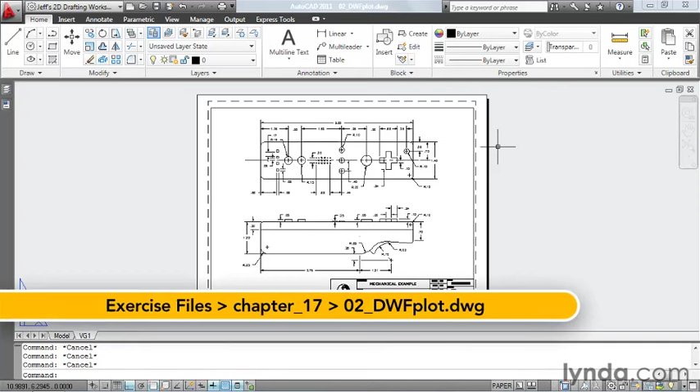Sometimes a client may want to review our CAD drawing, but they don't have AutoCAD, so a DWG file isn't helpful. At times like these, we can ship our client a DWFX file. DWFX stands for Design Web Format, and a DWFX file can be opened or printed from a current version of Internet Explorer.

On my screen, I have a finished drawing. Let's say I'd like to send this drawing to a client for their review, and let's also say that my client doesn't have a version of AutoCAD.

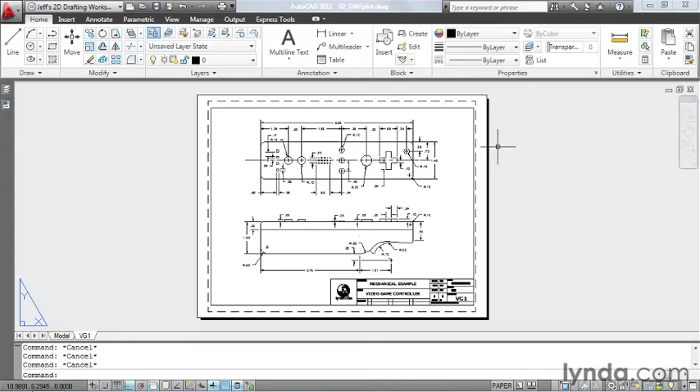What I'm going to do is plot this drawing as a DWFX. I'll do that by launching the plot command, and then regardless of the printer I was using, I'm going to click this flyout and select DWFX ePlot. This is a virtual printer that is installed automatically with AutoCAD, and that's all I have to do.

I'll come down and click OK, and I'm going to save this inside the Chapter 17 folder inside our Exercise Files directory. I'll accept the default file name, and I'll click Save.

The file I just created can be opened natively in Internet Explorer. I'm going to open my Windows Explorer, jump out to the desktop, open up the Exercise Files folder, and come down and open up Chapter 17. Here's the DWF file that we just created.

I'm going to right-click, come down to Open With, and select Internet Explorer. Now, if you're not seeing Internet Explorer on your system, you can select Choose Default Program, come down and select Browse, navigate into the Internet Explorer folder, and the executable is right here. Since Internet Explorer is selected, I'm going to click OK.

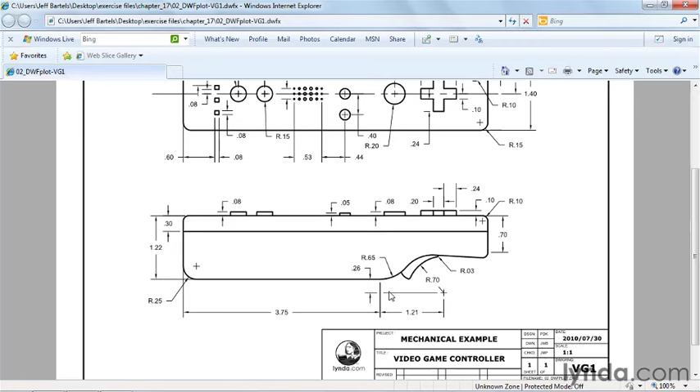And this is how my client can review the drawing. I can roll my scroll wheel or use these sliders to pan around in my drawing. Underneath the page flyout, I have access to my zoom controls where I can zoom in and out. Likewise, I can press Control+ or Control- to zoom. If I'd like to print the drawing, I can use the icon right here.

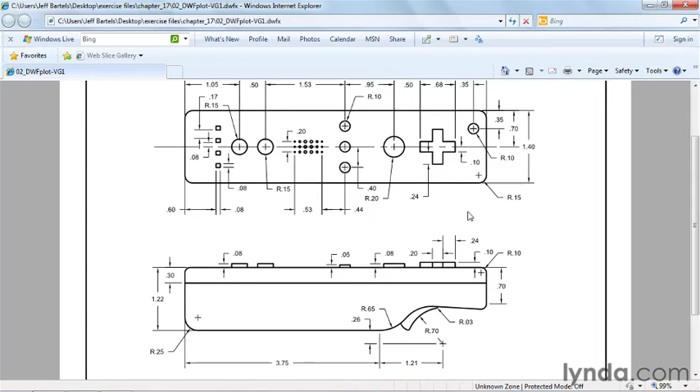Using the DWFX format, our client can view or print our drawings without the need for a special viewer. I'm going to close this, and we'll return to AutoCAD. Plotting our files to the DWFX format allows our clients to collaborate on the design process even if they don't have AutoCAD. So long as they have a current version of Internet Explorer, they can view or print our drawings.